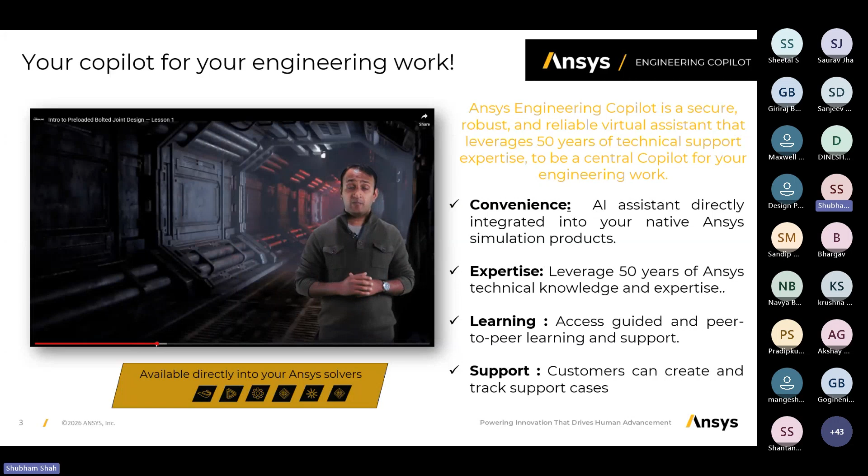Then we have the expertise, the trained models, basically based upon existing Ansys technical knowledge and expertise. So here you will not find any open source data - all the results or answers you get will be based on your Ansys database itself. You can also have the learning access.

Let's say you're very new to the simulation domain and want to learn, or you're an advanced level user wanting to expand your working knowledge on certain advanced topics - that can also be done using this Copilot. And then there is upcoming support from where you can raise support requests directly. This is an upcoming part.

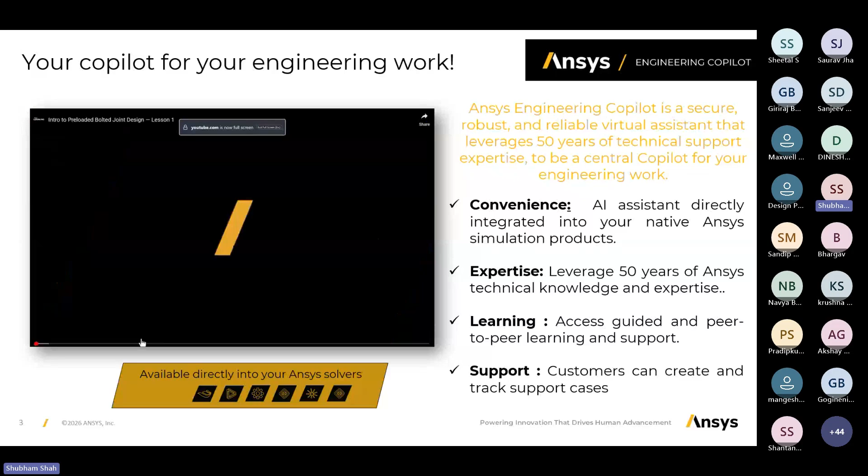So with the Copilot, you can search across the entire Ansys website. You have access to 1000 plus Ansys Innovation courses, which are majorly free. Then there are knowledge articles - a huge amount available. Then there's a global forum where you can post queries and get responses from global Ansys users. And you have 24/7 virtual assistants along with the tool.

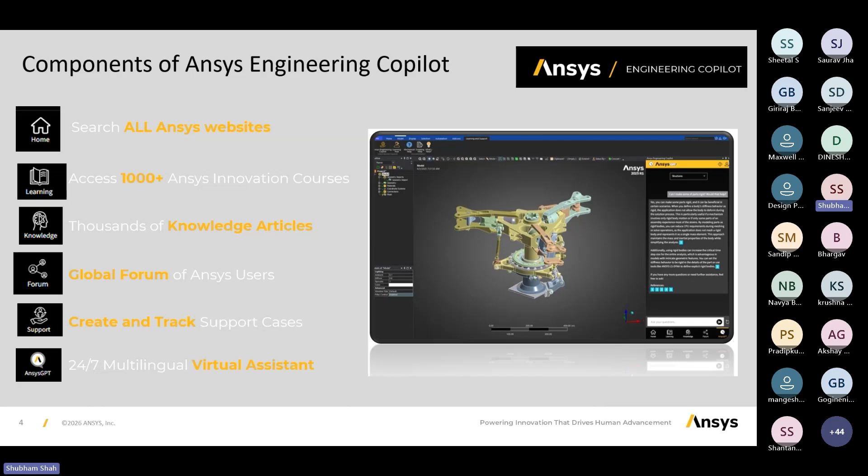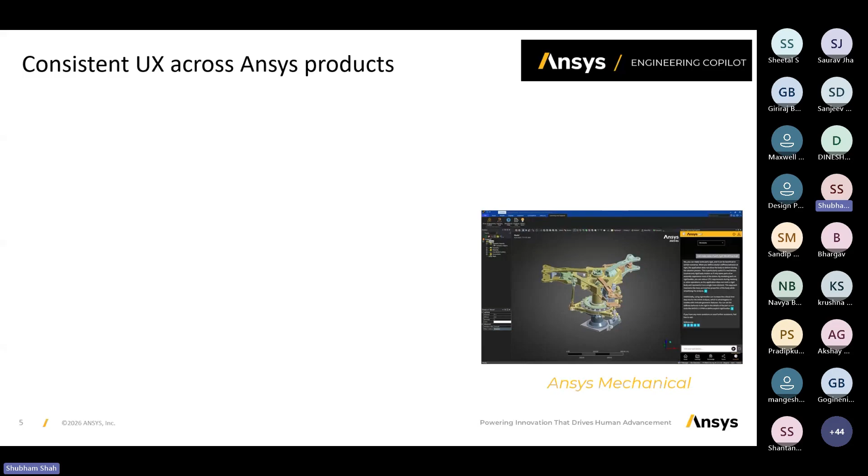So this is the consistent UX. Basically, it's not limited to any of the products with the tools, the solvers. You can use it with Ansys Mechanical, use it with Discovery, the SCADE one, the Fluent. So it is not restricted to only one or two physics. It is open for all the physics.

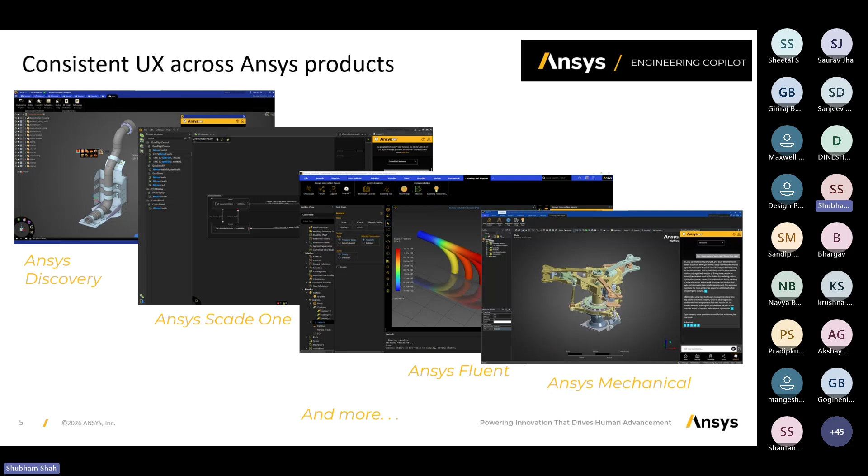So now I will take you to the tool where we can see how we can open and use it and what are the different ways to utilize this. Let me show this project which has already been opened. A simple fluid flow problem is there. So this is the Fluent UI basically, the CFD part, and on the top of the ribbon you can see there is a learning and support tab which is already there.

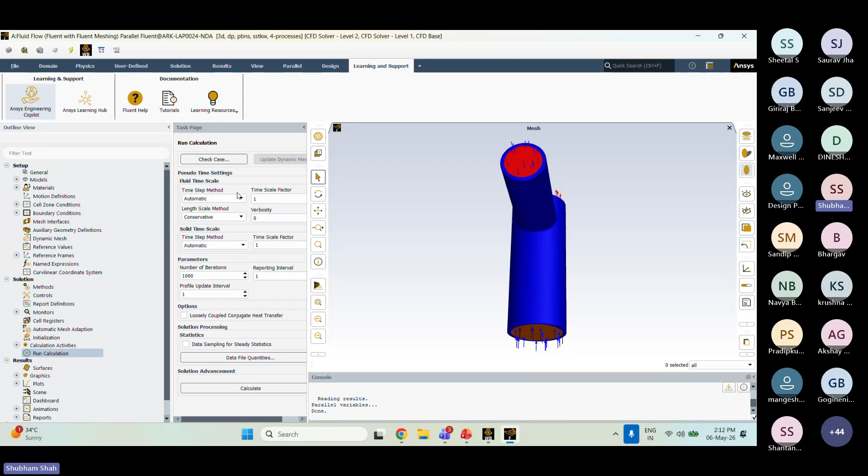So we just have to click over here, and from here you can see Ansys Engineering Copilot, Ansys Learning Hub, Fluent tutorials and learning resources are there. Once you click on this Engineering Copilot, you can see on the right hand side Engineering Copilot has been opened up. So this is all inside the tool itself.

So once you open it up, you have to log in. It will ask you for the username and password. Once you enter the username and password, you can have the access for the Copilot. And the major thing is this is not a separate license and it is free of cost.

Then you have a learning tab where you can go for the learning. You can search for your learning based upon which physics you want to learn. So this is fluid. Let's say I want to see how to perform the external aerodynamics, right? So once I click, it will pop you up to a new window.

And from here you can see this is how you can log in. So I'll just log in.

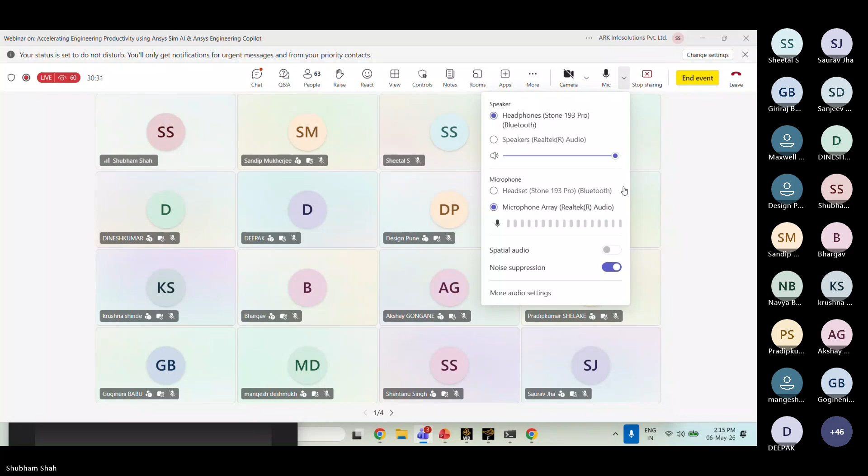Shubham, can you please check your internet connection? In between your voice disappears. Am I audible now properly? You are audible when you are speaking, sometimes your voice disappears. Okay, just a second, I will check it up with the microphone settings also. Now is it properly audible to you all, or you are facing any lag or something like that? It's perfect, it's perfect now. Okay, no problem.

So as you can see, I have just opened this, like I want to learn the performance aerodynamic analysis of a car, how can I do it. Once you search, you can see you have been enrolled into this one. You can take the different lessons, you can go on YouTube to watch the videos. These videos will be specifically from the ANSYS domain itself, no open source material. It will showcase you. Once you open it up, you will be getting Team Sonic Boom using Ansys Discovery for F1 in school car design. So this is how you can use this Ansys GPT and Engineering Copilot.

So once again coming back to the tool. So this is for the course, this is for the knowledge. There are various tabs. You can also bookmark the articles, you want to see the general fluids article, you can search in the knowledge base. Then we have Ansys GPT, the major thing which will help you out to understand the things. So let's say here we have the Ansys GPT and you are solving any of the question problems.

Of the simple problems or advanced level of problems, and you are facing any issue, how we can resolve this?

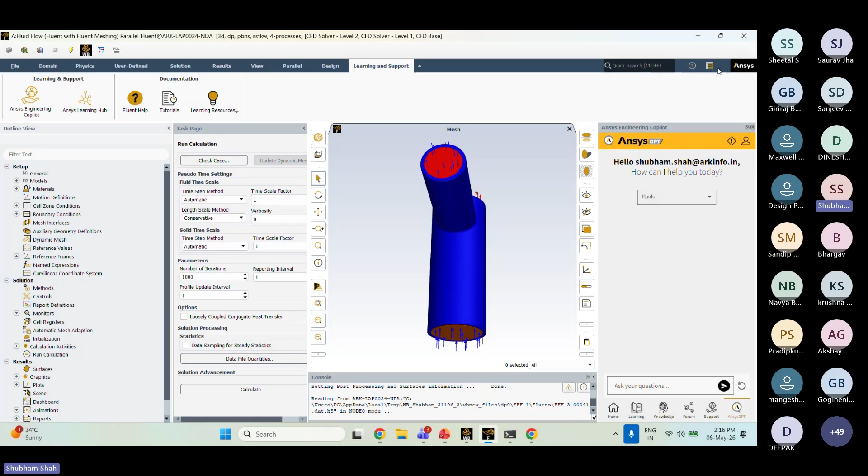For this, what I will do is take one of the problems, this simple fluid flow problem, so that we can also see the results quickly, how it is helping out. I will simply close this one, do the meshing and everything here itself. The problem is very small, so it won't take that much time to run. We will do the shared topology and some pre-processing, then move to the meshing part and see what we encounter. We'll do the setup also, and run the simulation.

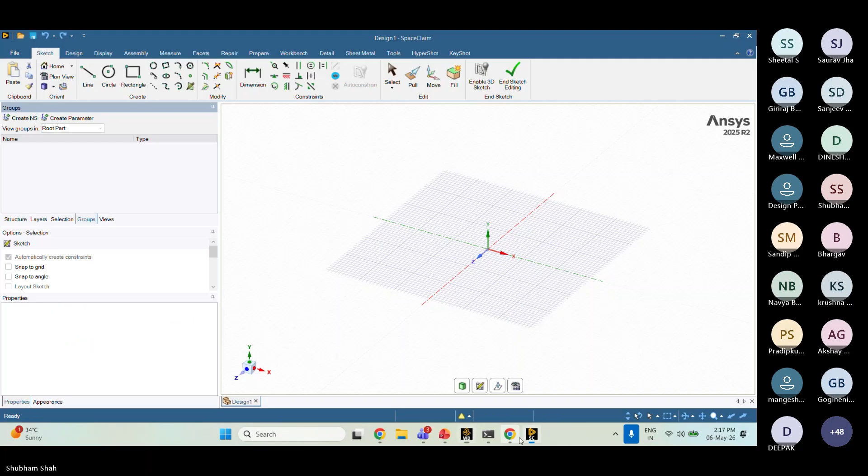So what I'm doing is, first of all, I will just unshare this one. And what I will do is I will start from scratch. I'll simply delete this one.

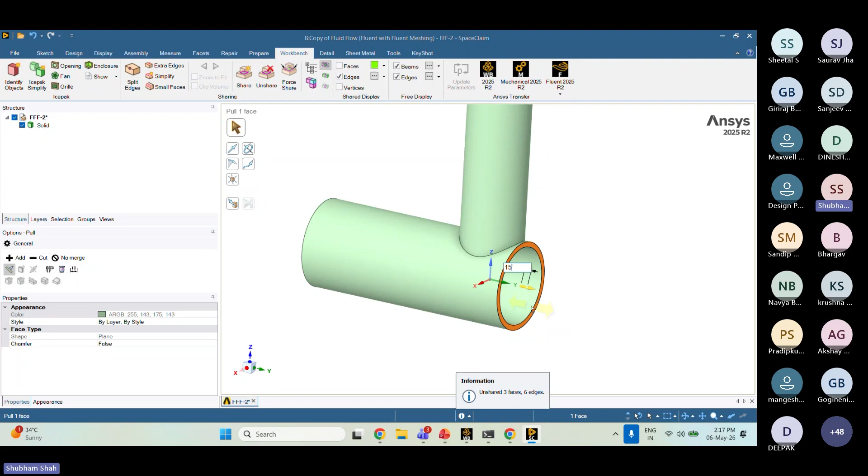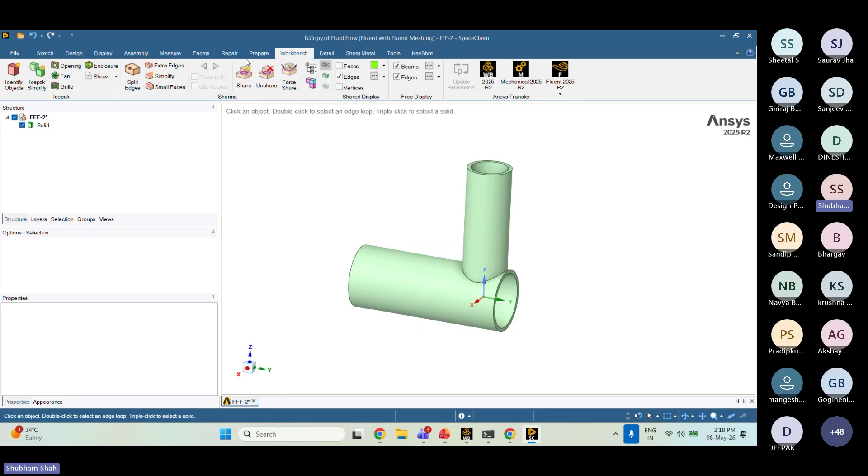Let's say our flow is going to enter from here, and it is going to leave from here. We can see here there is no such outlet domain to stabilize the flow. Now we will take suggestions from Ansys GPT also, like if this is the scenario, how we can rectify this, and based upon that we will see what different suggestions it gives us.

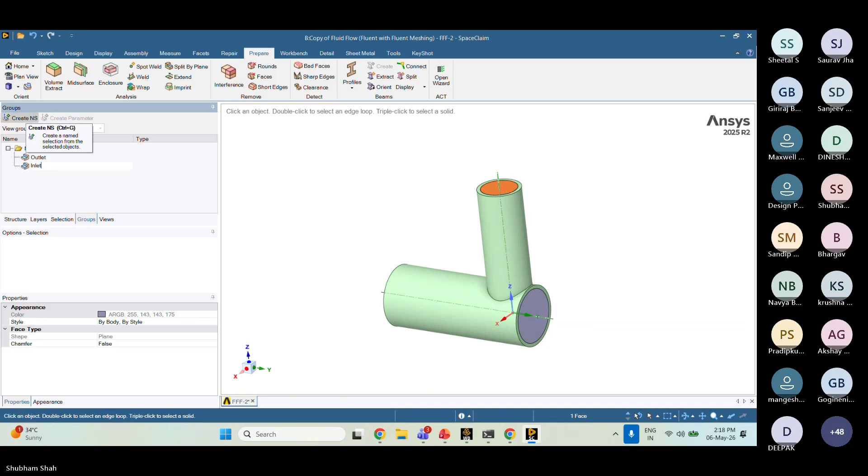First of all, we'll quickly extract the fluid volume, and I'll give the named selections. This is my outlet, I'll simply give outlet. And this is my inlet - inlet underscore small. And let's say this is my inlet large. Simply I've given the named selections. I'll share the topology.

Now I'll quickly do the meshing part. Switch it to MM. It will take around 2 to 5 minutes only for running this entire simulation, doing the meshing, and then running it for a few iterations, and then we'll see how the flow is performing, whether it is getting stabilized or not. If it is not getting stabilized, or if we encounter any reverse flow, how do we resolve that?

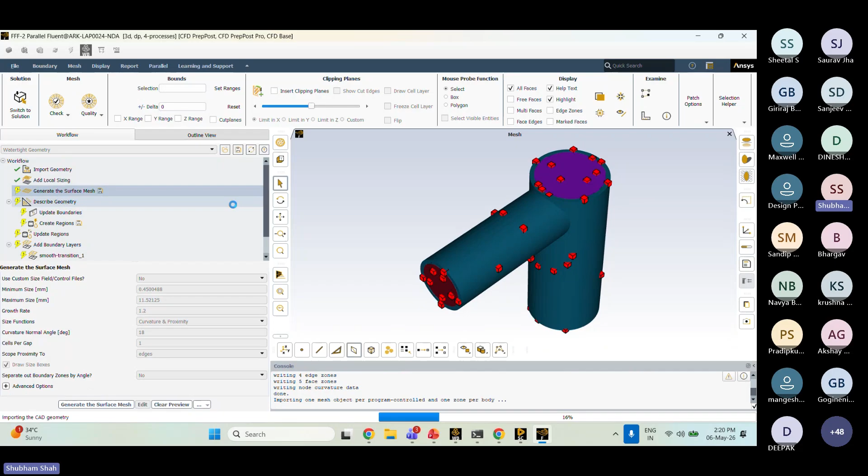So we'll simply import the geometry, and go with the default mesh generation. We will not give any kind of local sizing, since it is for a demo purpose and we don't want any sort of accuracy as of now. We are just concerned about how the flow is going to get stabilized.

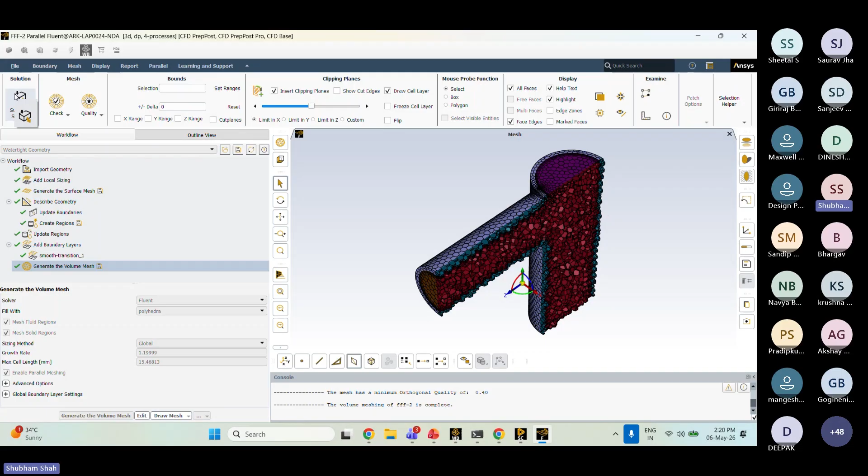The mesh quality is around minimum orthogonal quality of 0.40. We'll switch to the solution.

Once this is done, we will also take help from the GPT, that is your Ansys GPT. You can also access Ansys GPT from the direct web UI as well, from your Chrome browser or Internet Explorer. So that also I will showcase you.

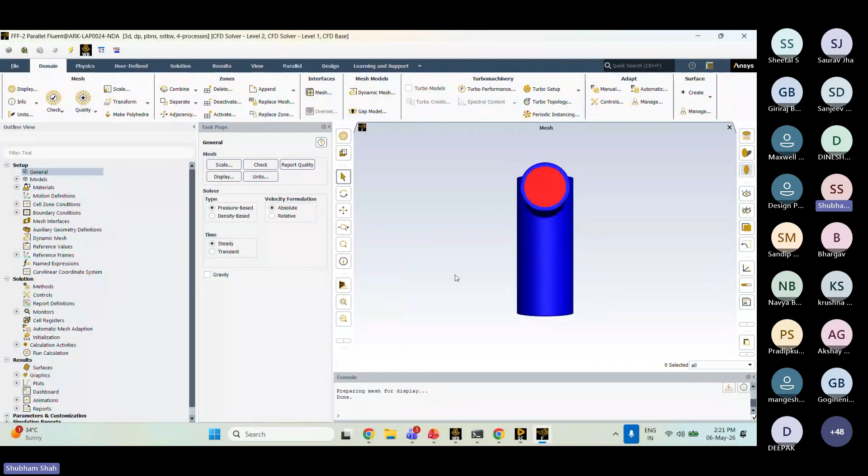So let's say this is the geometry. I want to go with the simple heat transfer, turn on the energy equation. Simply we will give the boundary conditions: inlet will be inlet, 75 degree temperature is there. Apply, close. And in the small one also, we will give, let's say, 30 meters per second and 100 degrees centigrade.

And we will simply initialize and run the simulation. This is just for the understanding point of view, so we can skip a few of the conditions as well.

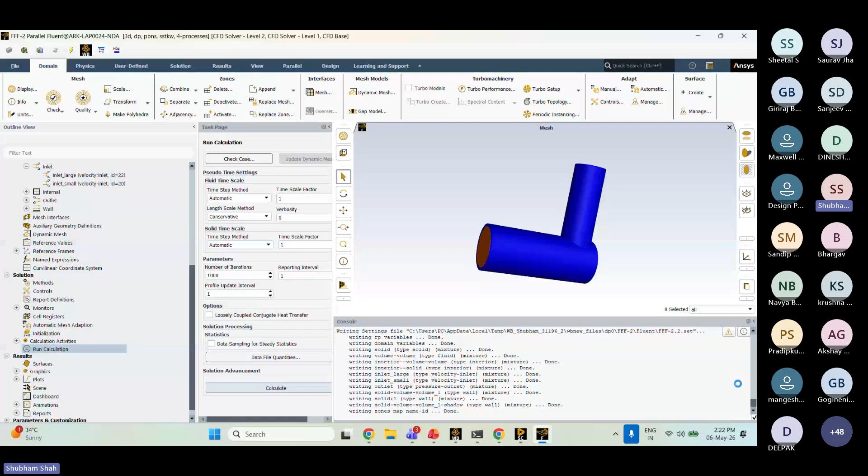So you can see I have just stopped. Reverse flow is increasing from 0.1, 0.3, 0.4, 0.7, 0.9, 1.1, 1.4. It might also increase to 50% or 70%.

Now let's say you have run this for 1,000 iterations and your reverse flow is not reducing. If it is under 10%, that is okay, it won't create that much of a problem. But when you are working on any kind of MRF simulations, blower simulations, pump kind of simulation, or turbo machinery, at that point if your outlet is too close to your recirculation zones or the blower outlet domain, the MRF region, you will see a lot of instabilities in the flow. So at that point, how do we rectify this kind of challenge?

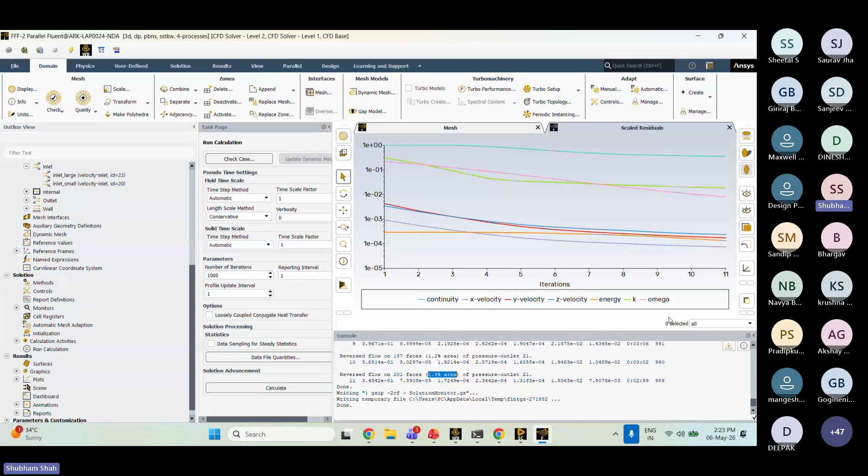So let's say right now it is 1.4%. It is under the good-to-go conditions, but we are concerned because we don't want any sort of reverse flow. So either you run it for more iterations, or let's take the suggestion from the GPT.

So here is your engineering copilot, and you can see it is getting loaded. Once it is open, we will ask the Ansys GPT, since we are facing a reverse flow issue. You can go to the GPT part, fluids domain, and ask your question here.

I am facing reversed flow in simple... I am facing reverse flow mixing... T simulation.

How to resolve the reverse flow? I'll simply press enter, and it will give the feedback based upon the questions you have asked.

Reverse flow in mixing tee typically occurs when the local pressure difference across the boundary causes the flow direction to change, and it will give the resource from where it is taking it. Similarly, it will also occur in cases where there's persistent convergence problems, especially in mixing planes. It gives you answers based upon the questions you are asking.

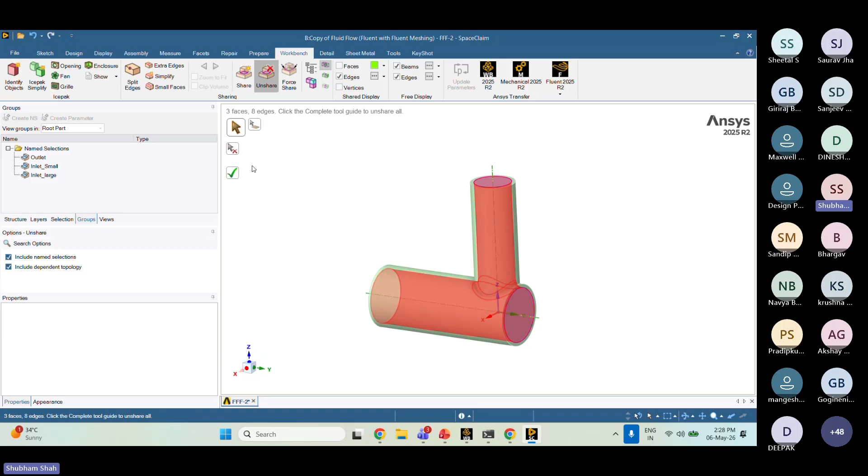We'll come back to the geometry once again. I'll simply share and pull this volume directly.

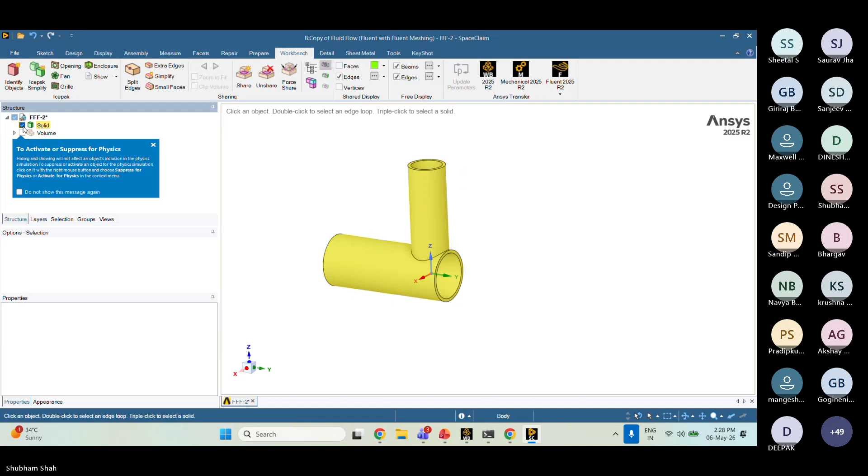It's 250 mm. Let's say 100 mm. If it seems less, we can go with 150 mm or 200 mm.

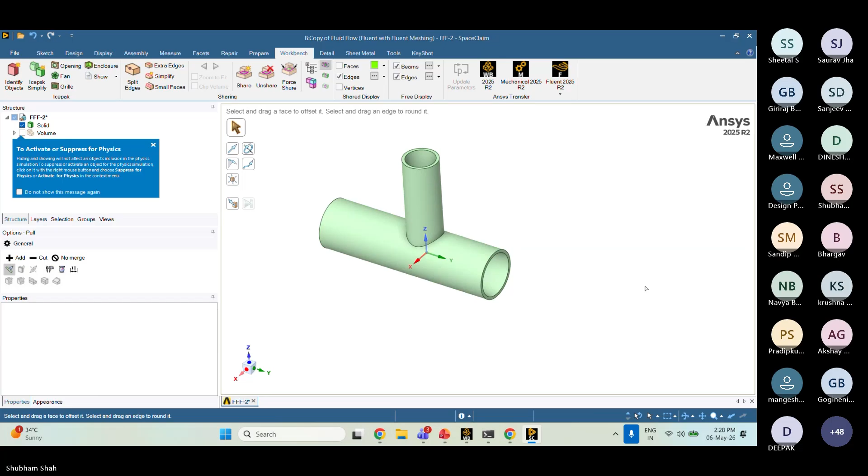Now we can extract the fluid volume, or you can directly pull this volume as well, and there is no problem in that also. I generally prefer going with volume extraction again, if there are any sort of joints available.

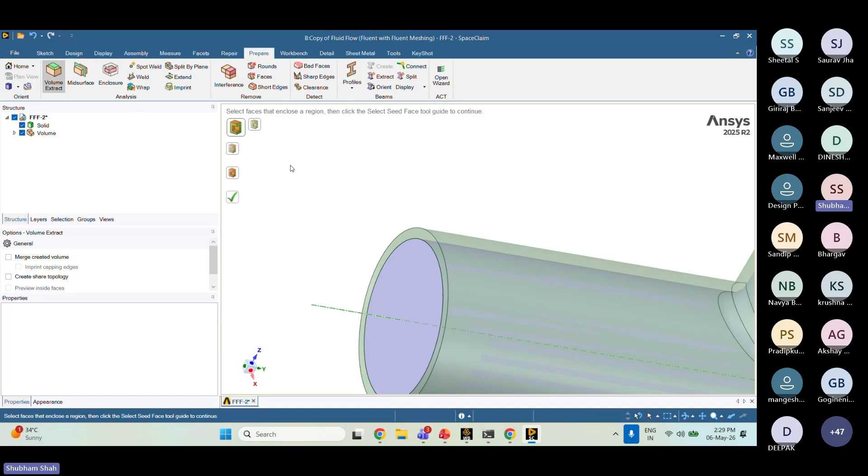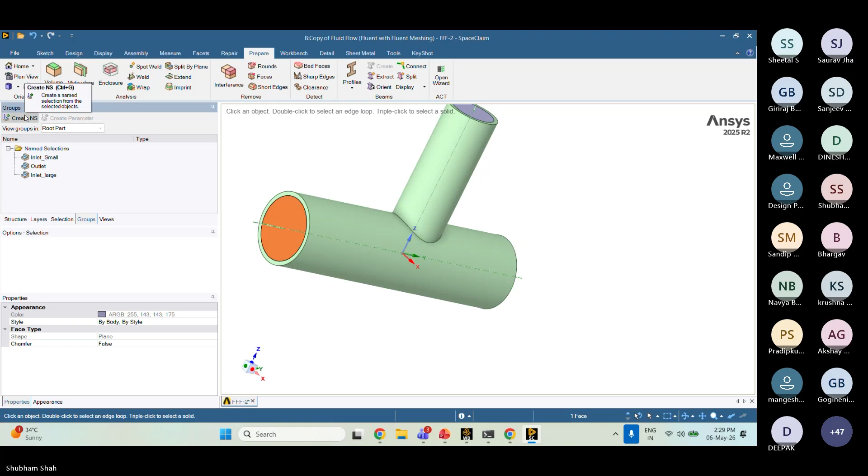Simply we will do this. We can quickly give the named selections. This is your outlet, this is your inlet. Quickly we'll do the share topology, and then we'll update the mesh directly.

So this will help you out where you are seeing significant amounts of reverse flow, or when you are dealing with any sort of turbulent turbomachinery kind of problem, especially where there are impellers or rotary equipment involved, whether it's your pump or your blower. There you generally face the issue of reverse flow.

So there you can extend the domain. How do we extend the domain? That also you can ask the GPT, like how generally we can extend it. The general criteria is we generally extend the domain based upon the diameter, so 3 to 5x of the diameter we extend the outlet domain.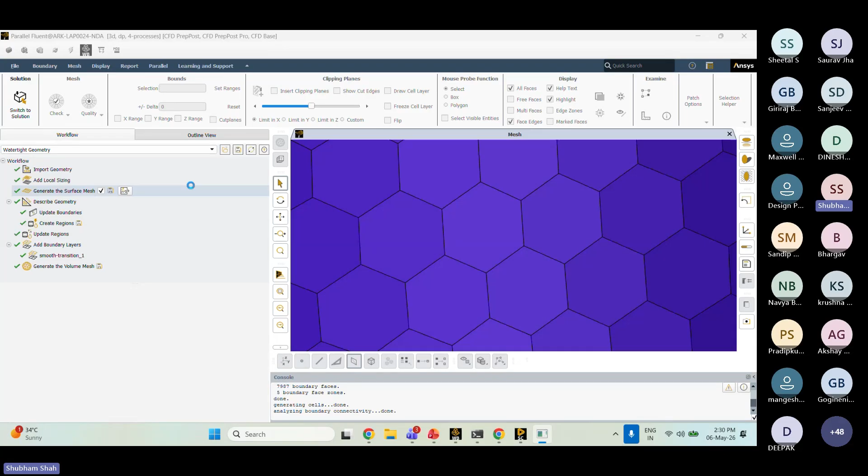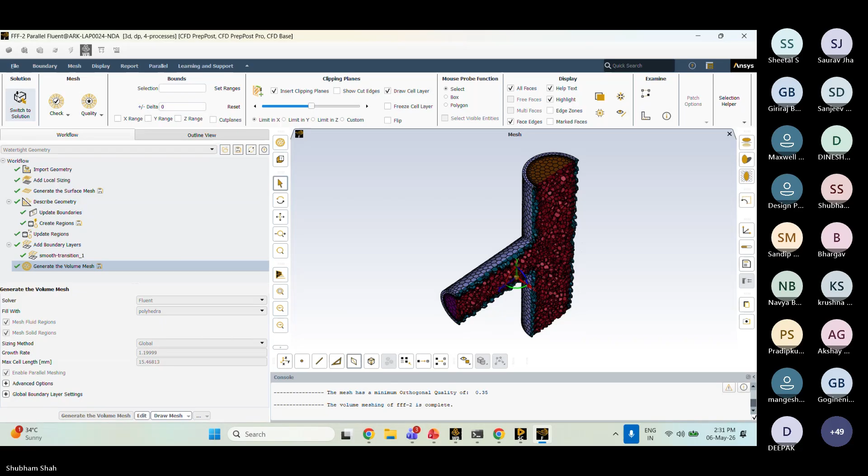So, has anyone of you used this Ansys GPT, or are you aware of how we can use this GPT in our day-to-day work, or are you getting to know it for the first time?

Shubham, there are people who have questions on the GPT. Okay, so these questions are on the chat box. Yes, they are on the chat box. Some questions are like, from what version and above is it available to use?

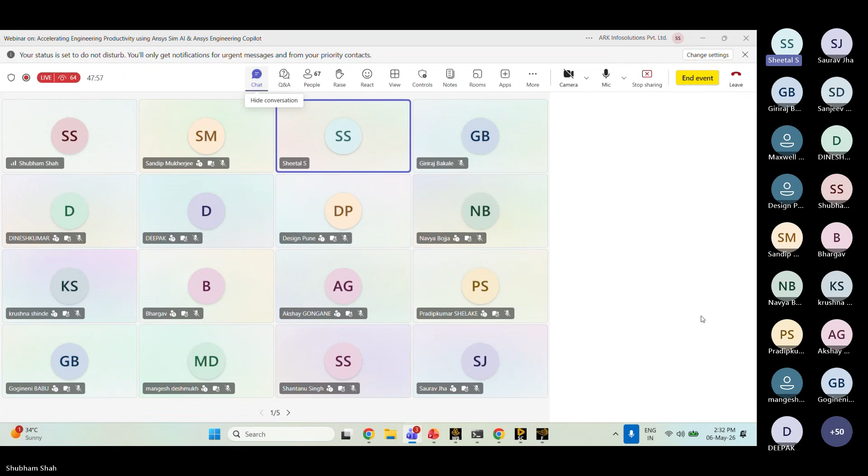Okay, there are a lot of questions I think. So, this is available from 25 R1 onwards. I think you might be using a previous version, so that might be the problem.

In Workbench Mechanical, would it also work similarly? Yes, in Mechanical also it would work the similar way to use this Ansys GPT and the Engineering Copilot. In Mechanical you can also find the learning and support tab similar to this, and from there you can use it. So there is no restriction based upon the physics.

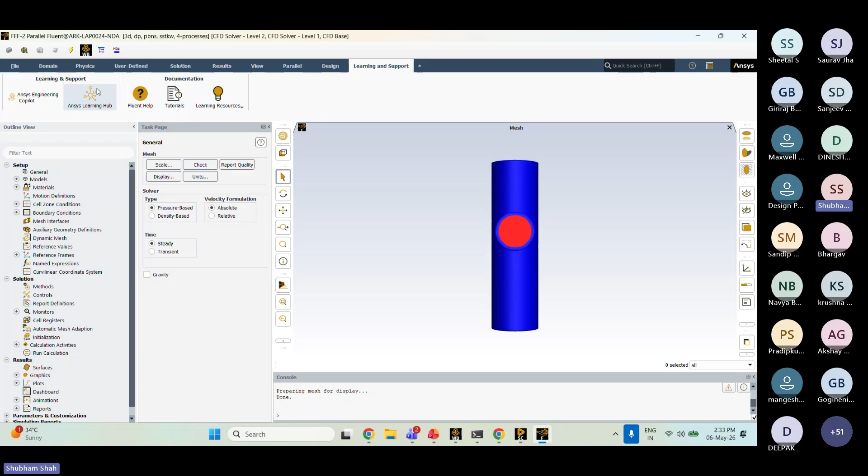Sorry to interrupt, sir. Sir, is there any limitation of license? Can we use this on the student version also?

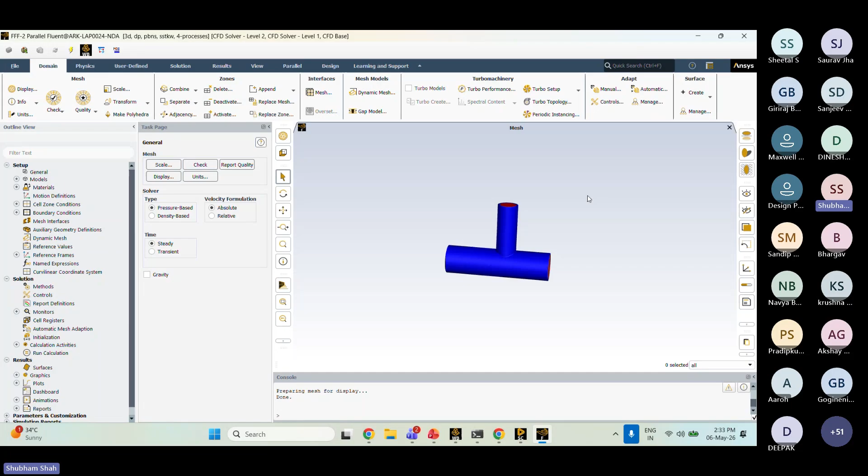Student version, yes, I think you can use it, but this is generally for commercial use. This feature is included in the commercial license at no extra cost, but it's majorly for commercial use. It will also be there in the student version, with no such restrictions to use it. But the main thing is it is only supported in 2025 R1 or above. If you are using a lower version before 25 R1, this feature will not be there.

So this has been introduced in 2025. I am using 2025 R2, and in that it is available. I hope your query is clear, right? Yeah, thank you so much, sir.

Okay, welcome. So now we'll simply take the same boundary conditions, we will not change them, and we will see if the reverse flow is resolved or not.

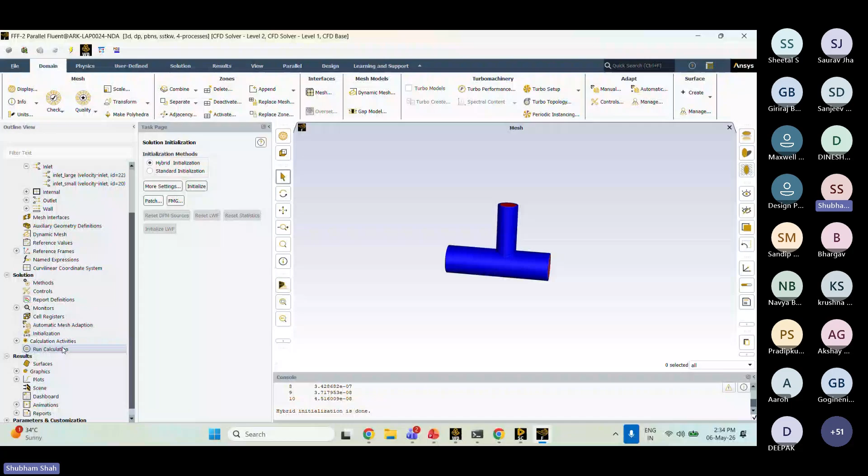So you can see the reverse flow is resolved. Additionally, in the first few iterations only, you can see there is no reverse flow at all. So this is how you can take suggestions from the Ansys GPT if you get stuck at any point of time, for smaller queries or even for training materials.

So let's say you've resolved this, or let's say you might be working on complex physics or mismatching boundary conditions. So you might sometimes get the error of floating point exceptions, right, if you are aware of it.

So if you get any sort of that error, you can simply write: I am getting a floating point exception error. So the GPT will help you rectify these errors. It will showcase a few suggestions. You can try them out, check it step by step, to find what could be the possible cause of this floating point exception.

Generally, numerical instability is there, so setup-wise that is the major thing. Apart from that, your hardware can also restrict it if the hardware is low. So you can see floating point exception common causes: poor mesh resolution, improper boundary condition placement, linear solver failure, insufficient solver memory allocation.

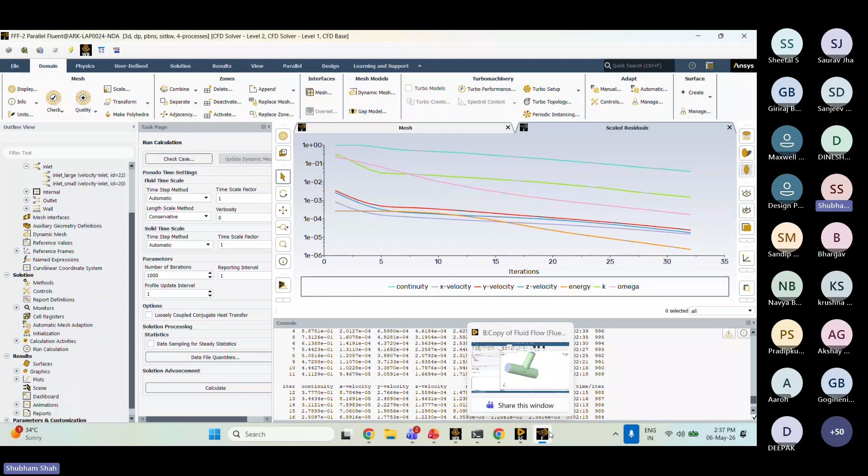ALH access is now directly linked over here, so you can directly go to ALH. Otherwise, if you're not so sure which multi-phase topic would be available where, you can write it here in the AIS, Ansys Innovation Space, or type the same in the GPT. So let's say I want to search the AIS, go into the learning phase, or select fluids, or let's say external aerodynamics.

So whatever is relevant and available to the term external aerodynamics will come over here. So external aerodynamics of a supersonic rocket, aerodynamics of a solar car, getting started with Ansys Fluent multi-GPU solver, external aerodynamics, introduction to aerodynamics 10, aerodynamics of a race car.

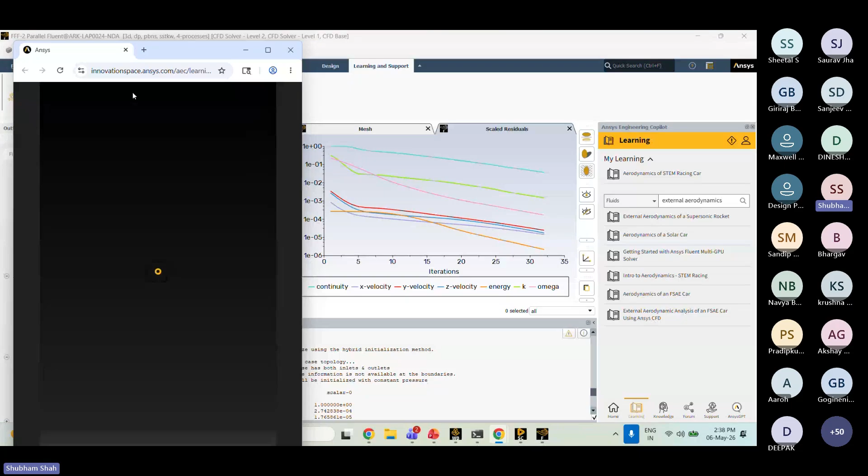So this is how you can use it. Let's say I want to go with the supersonic rocket. I can simply click it over here and it will open the Ansys Innovation Space in a new tab. From here you can take the lessons, you can enroll, you can take the entire lessons from here, and you can also get the simulation files and download them to follow the steps.

You can follow the material lessons, refer to the YouTube videos, and then go on to the next lesson: how to prepare the geometry, how to do the meshing interface, the meshing simulation setup, post processing, and then the parametric study. How do we do the parametric study for the external aerodynamics? And if you want to take the quiz, you can also take the practice quiz. This is how you can perform any kind of learning courses through this.

You can also get this from Ansys GPT as well. So from GPT also you can take this. Let's say you are in GPT and you want some tutorial.

Let's say you are working on some radiation model or something like that, and you want some tutorials on that. Or let's take an example of mixing tank only. So: mixing tank CFD simulation tutorials. All the mixing tank related simulation tutorials, it will share the link over here.

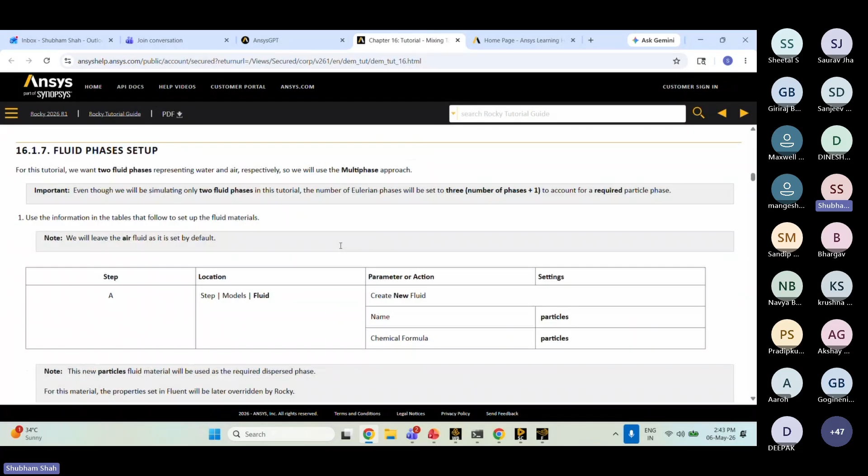So you can see this is a tutorial for the mixing tank, and it is also based on Fluent-Rocky coupling. You can see the entire tutorial with everything, step-by-step process has been given over here, so we can refer to this and do our simulation. This applies to whichever domain or physics you are working in.

If you face some sort of queries or errors during your simulation, this is a very handy tool placed inside your tool itself, and it's very easy to use. You can quickly ask questions and get tutorials if available, which you can use for reference cases.

You can also post any questions in the forum. Add a new post from here, create the category, and enter it—let's say it is for Ansys 3D design, which is basically your Discovery modeling or SpaceClaim.

Enter the title of the discussion and the details. If you have any screenshots, working files, or any URL you want to enter, you can add them and post it. It will get posted in the Ansys forum, so Ansys users who go through it will suggest answers, or you can have an open discussion—it's basically an open discussion platform.

So this access is also there. And then again, this GPT is already there for your 24/7 virtual assistant. So this is how you can use the Engineering Copilot and Ansys GPTs.

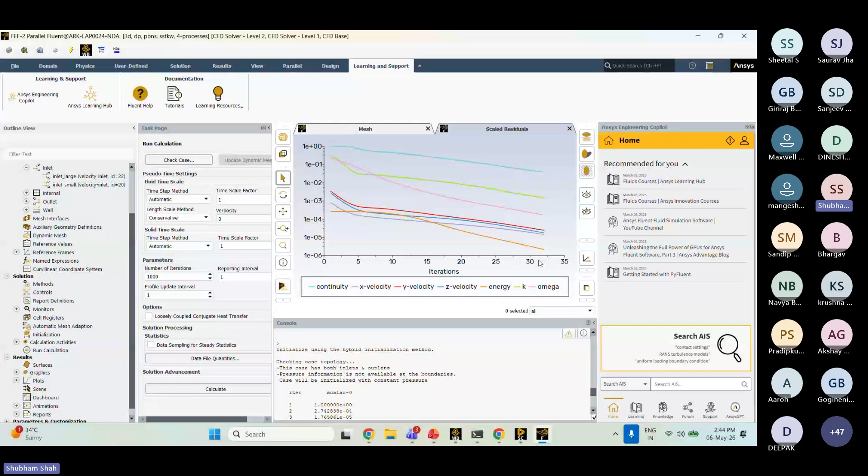So any questions up till now? I think there are two questions in the chat box, please.

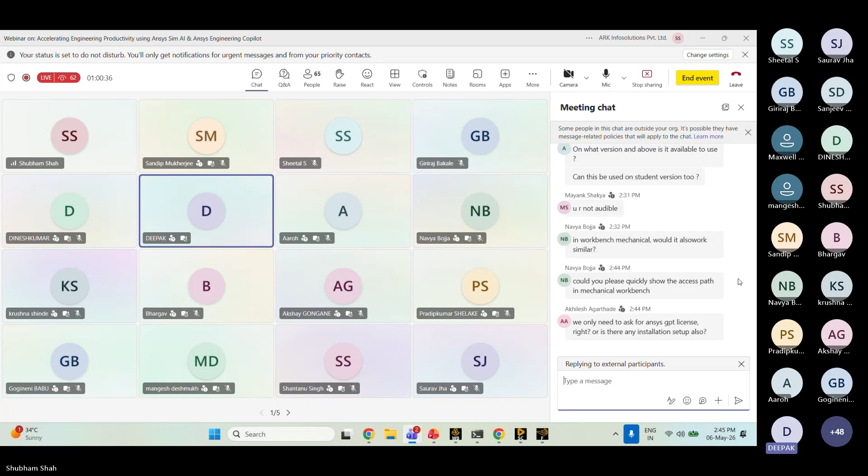Earlier the Ansys GPT was outside of the workbench, right? So we would have to access it separately. Now it is inside the workbench—for any of the applications, we can just pick it up and use it. Since this Fluent, I have launched it inside the workbench only, so this will be inside your Fluent.

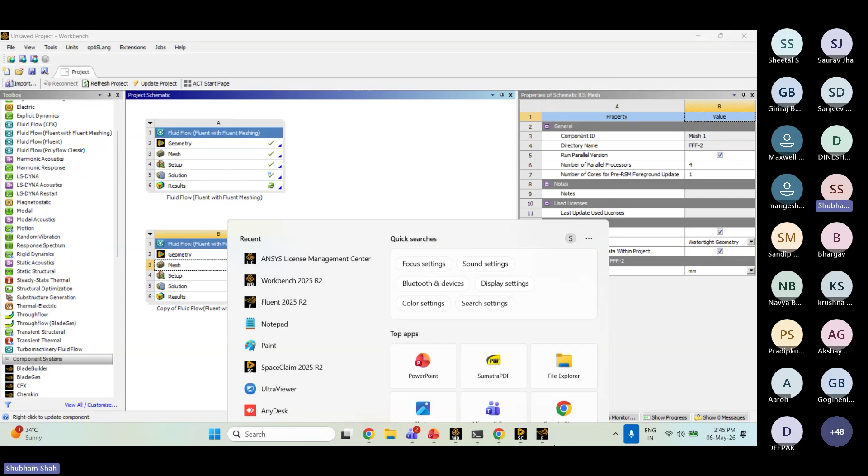In a similar way, let's say if you want it for Discovery modeling, so in Discovery also it is there—Discovery modeling, simulation. So it is available both in standalone as well as for your workbench also. Earlier it was outside, but now it has been integrated inside this only.

In 2025 R2, you will find a section called Learning and Support. From there only, you can use this Ansys Engineering Copilot inside the tool. And also, if you want to go outside the tool in the open browser, that option is also available, in the browser menu. So both options are available.

You just have to register it, and also if you are having this ALH license at your end, that would be more helpful for you. So you can also go through the content on ALH, which is available. Otherwise, even without ALH, you will get the open source—open sources in YouTube links and the tutorials in the manuals and all that you can access.

Can it be used, for instance, in harmonic modal analysis? Yes, you can use it in any of the analysis. That is not a restriction.

So let's say you are doing a modal analysis or harmonic analysis and you are facing some sort of error, or there is some challenge, or you are getting some sort of errors while performing the simulation. That error also you can mention in the Ansys GPT, and that will help you understand why this error is happening.

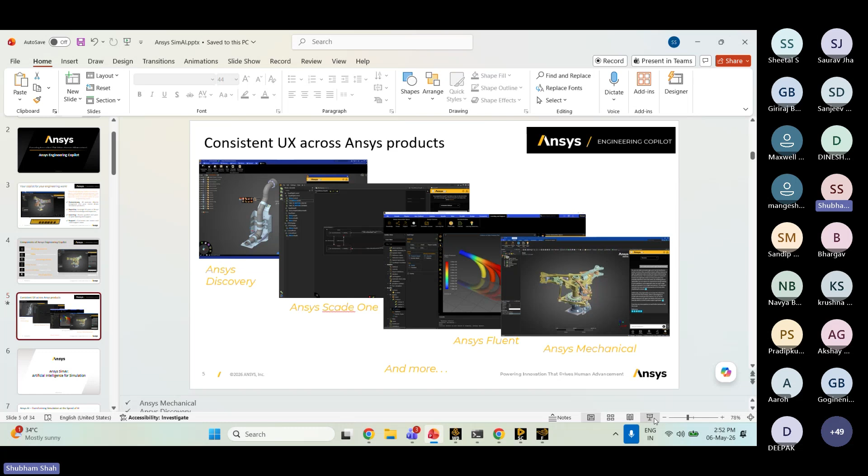SimAI is basically your artificial intelligence for the simulation world. Ansys AI consists of three parts: Ansys AI Plus, our upcoming part which will be there as an add-on; Ansys SimAI, which we will talk about and I will give an overview of now; and Ansys GPT and Copilot, which we have already discussed, where I showcased a simple demo of how we can take suggestions from the GPT and perform our simulation with the result solutions.

When it comes to SimAI, that is basically speeding up the simulation with the help of AI. Three steps are involved: first, upload your past simulation data; then train the AI model as per your requirement; and then we predict the results in seconds or minutes basically. So this involves a three-step process: upload, train, and predict.

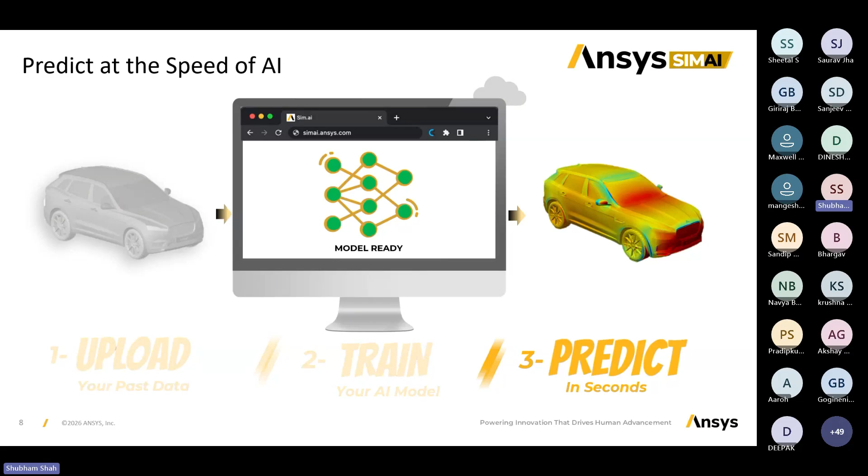I will also show you the brief workflow and a demo of SimAI. I have got a few videos which will help you understand the entire working demo of SimAI. Basically, SimAI is a new cloud-based AI platform for simulations, which will help you speed up the simulation. But it doesn't matter which physics, it is physics neutral.

You can perform any kind of physics simulations, whether it's structure, fluids, optics, or electromagnetics. It can work across all industry segments, whether you are in semiconductor, electrical, motor manufacturing, automotive, EV industries, or aerospace. This will help you out.

Any sort of 3D simulation data, it will help. So let's say you are training your AI model for simulation, but your previous runs were done from some other tool, not from Ansys. That can also help get your model trained.

So it is not only restricted to Ansys itself. Once you give this previous data and train your AI model in such a way, you get the expected results in minutes and seconds.

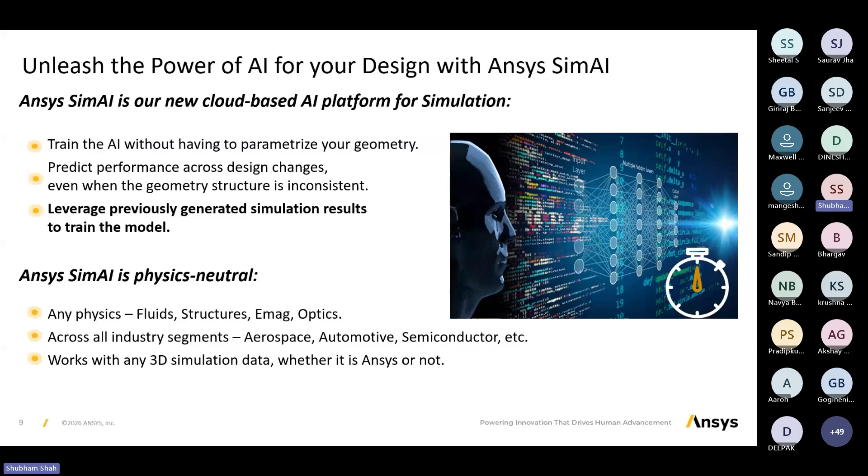With SimAI, you have to upload your data. When it comes to uploading data, we all know simulation data is huge in size, somewhere from 1 GB to 20, 25, 30 GBs. So uploading speed is 1 minute per GB, so it will not take that much time.

For training your AI models, it will take somewhere around 2 days, around 48 hours, to train your particular AI model. Then prediction of the results for the new design will take somewhere around a few seconds to a few minutes.

When it comes to training your AI model, if you want to perform aerodynamic simulation, we train our AI model for external aerodynamic simulation. If you have to do battery simulation, we train our AI model with battery simulation data from previous simulations already done in Ansys or another tool.

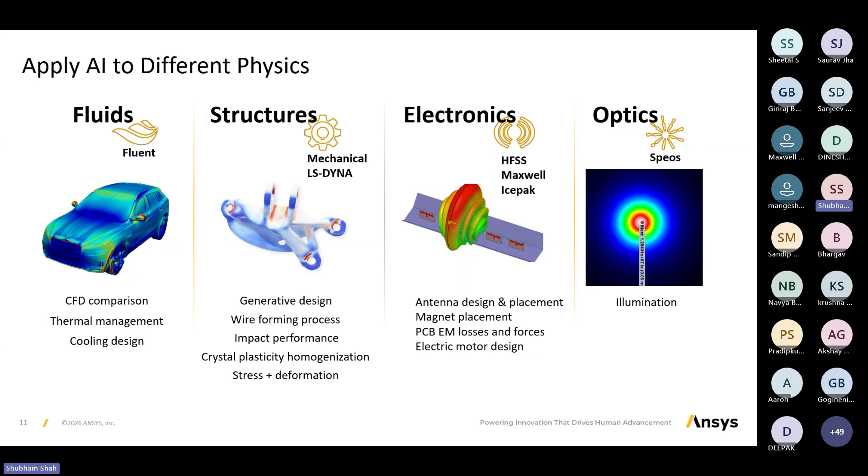So it is not restricted to any sort of physics, it is physics neutral. You can use it for fluids, that is your CFD part, you can use it for structures, mechanical LS-DYNA, electronics, or optics. All these options are available for the same AI.

Now coming towards the workflow, we'll see how the workflow helps us with the SimAI part. Basically, first we have to prepare, then explore, then validate.

What comes in prepare is data, your existing simulation data. Let's say you have been working on aerodynamic analysis for the past 1 year, or you have 20 or 30 different aerodynamic analysis datasets that you can upload.

Then you can train your SimAI model, and based on the trained model, you can explore various design parameters and simulations, and then validate the one which is more compatible or relevant to your simulation, validating that with full fidelity simulation.

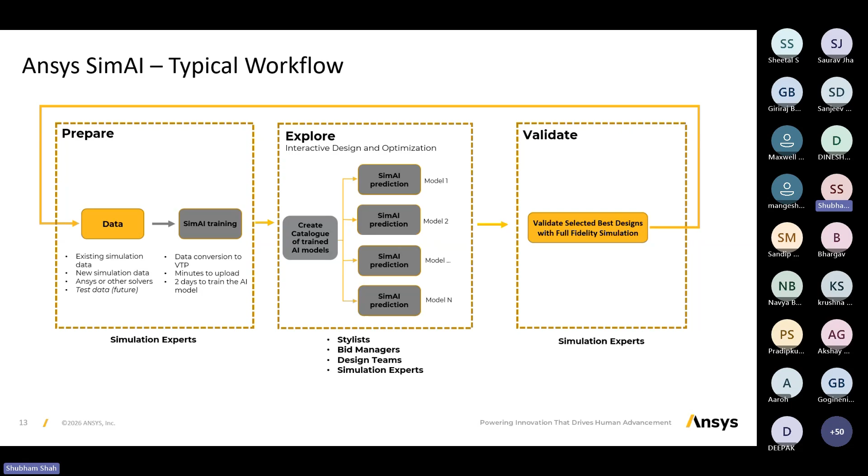So this is one of the examples of the workflow for SimAI basically: upload, train, and predict. These are the three steps for SimAI.

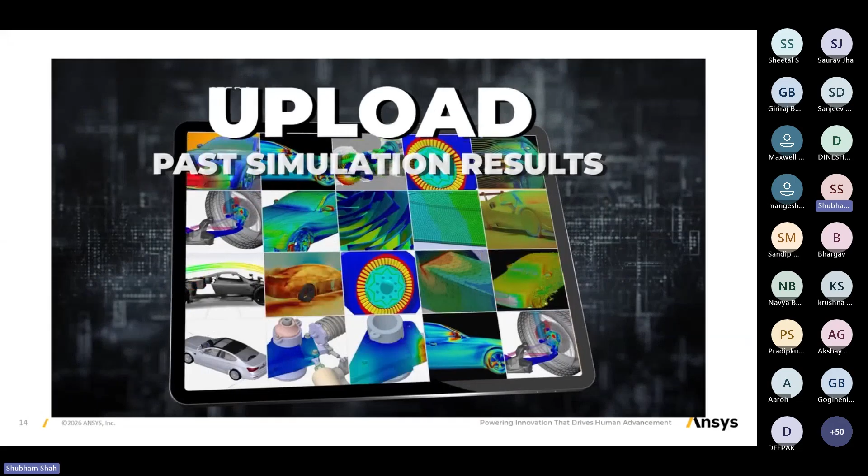We will upload the past simulation results, train your AI model, whether it's for external aerodynamics or whichever physics you want to go with the simulation. Then you can see 20 hours of simulation time only taking 2 minutes to predict the same behavior, for an external aerodynamics kind of problem.

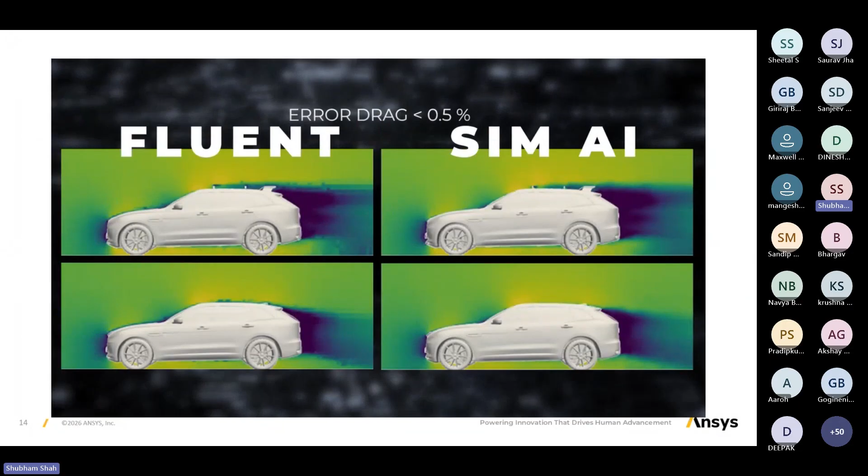Same thing, you can go with crash analysis or bumper analysis. Then there's cooling analysis, 1 hour on 64 cores, taking only a few minutes when we go with SimAI. The only thing is we have to train our model, which will require somewhere around 2 to 3 days of time.

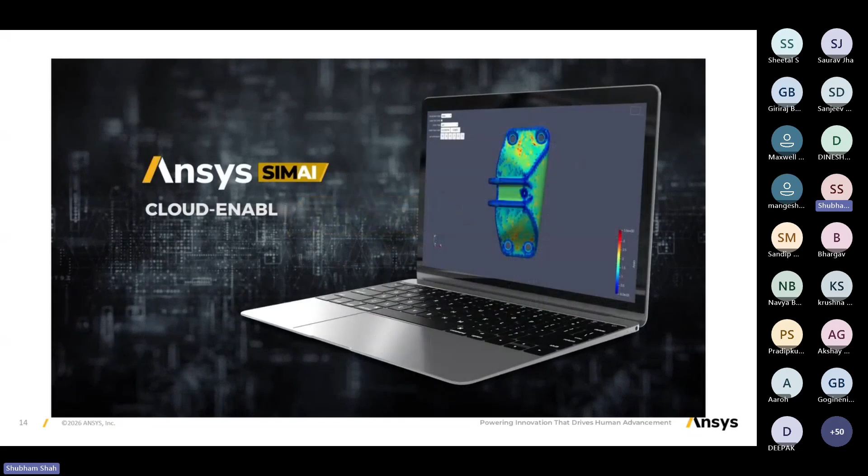Once the model has been trained, you will not take that amount of time to further predict the results.

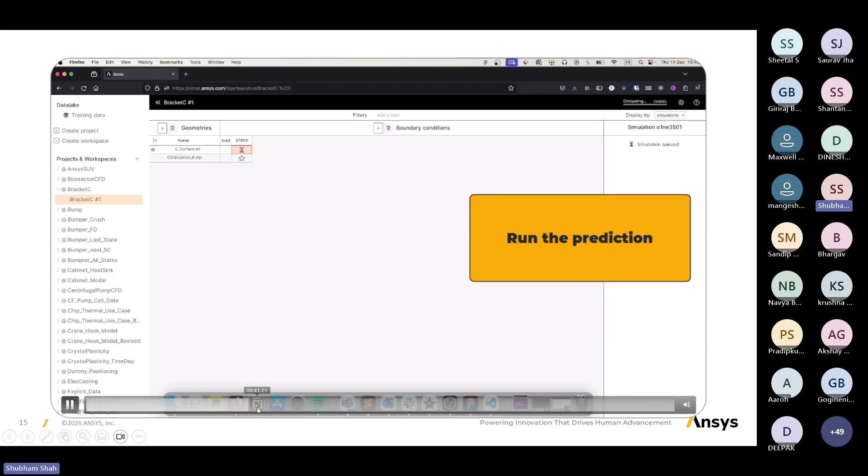Then we will be running the prediction. Similarly, if you want to upload the train data, that option is also there. On the right hand side, you can see we are generating the surface for the same.

Once we move forward, this is the run, because this model was already trained, and a trained AI version has been created. But if you want to build the model, this is the step to do it.

In this step, we will create a new project, give the project name, and train the model accordingly. We will add the existing data or add new data. We can simply drag and drop all the past simulations we've done, and it will get uploaded very fast. The speed is 1 minute per GB.

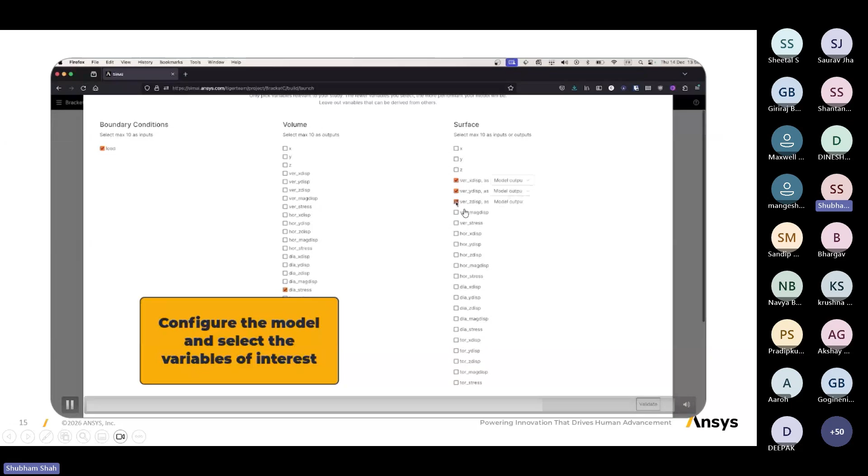Then we have to configure the model to analyze, giving the boundary conditions like what we are expecting. In this case, you can see we have selected the required parameters. This is how we configure the model and select the variable of our interest, and then we train this model accordingly. Once you do this, you have to define the volume, which you can do from here.

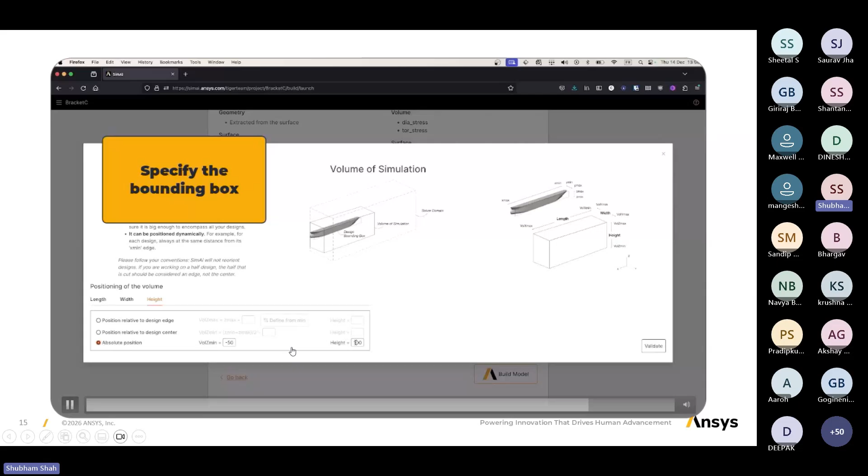This is for ship hull design. Based upon this, we build the model, and then we run for the prediction.

So these are just a few of the quantified case studies already developed. This is your bumper impact test and crane hook test for mechanical engineering. Now let me take you to the fluids case studies.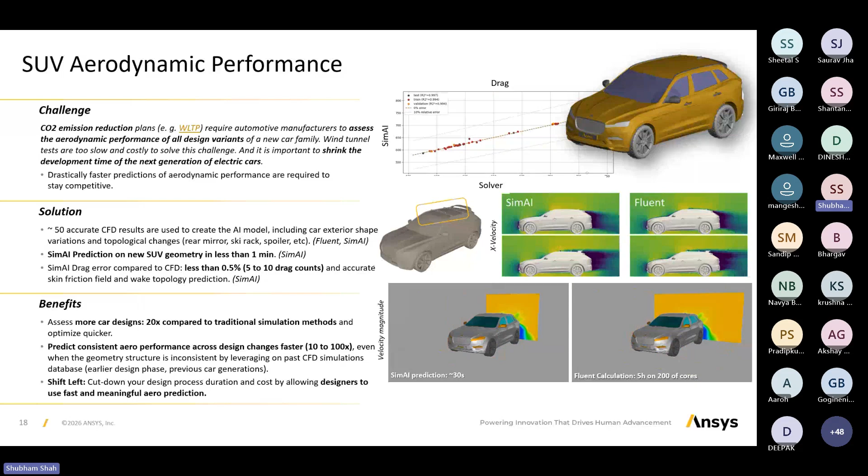These are a few various studies which we also saw. The fluid case was earlier done in Fluent, and for the Fluent calculation it took around 5 hours on 200 cores, but SimAI predicted it in approximately 30 seconds. This is how you can accelerate your simulation time and reduce the time needed to perform the entire simulations from scratch, helping you accelerate ongoing simulations using various AI tools.

This is for power inverter cooling. You can see on the bottom right hand side, Fluent took around 1 hour on 64 cores, but SimAI is nearly taking about 30 seconds. This is how you can reduce development and simulation time using SimAI.

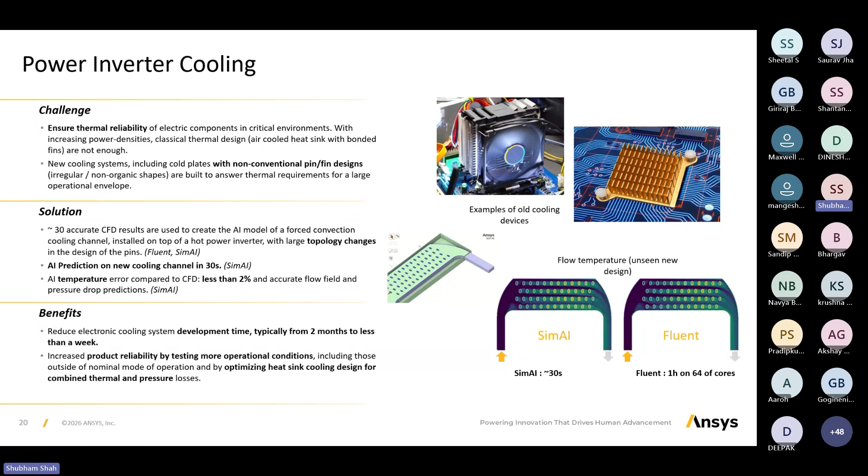You can also use this for centrifugal pump designs, or any kind of pump designs or turbo machinery parts. You can also use this for heat exchangers.

When you see the simulation with Fluent or CHT simulation Discovery, it's taking somewhere around 2 hours. But when it comes to SimAI, it's only taking 20 seconds. The outlet temperature with the detailed CHT study is around 57.3 degrees, but what SimAI is producing is 57.4 - very close to the existing results.

If you see the simulation time, it only took 20 seconds to predict. But with Fluent or any other solver, it takes more time to plot this kind of filling criteria or animation.

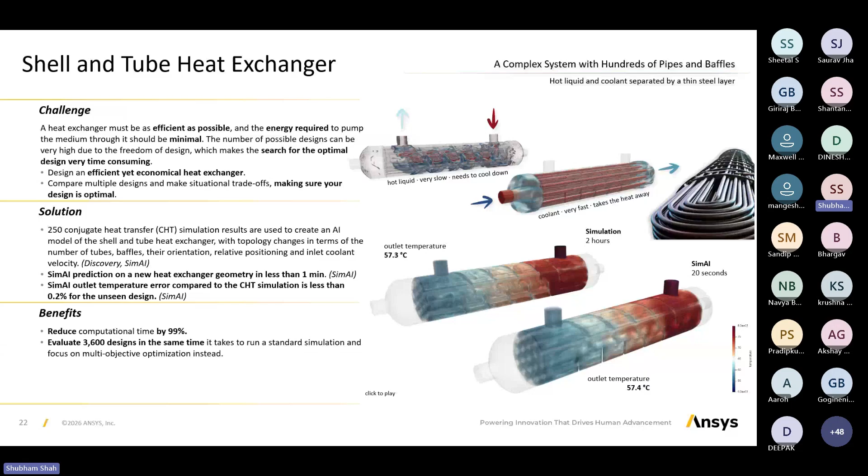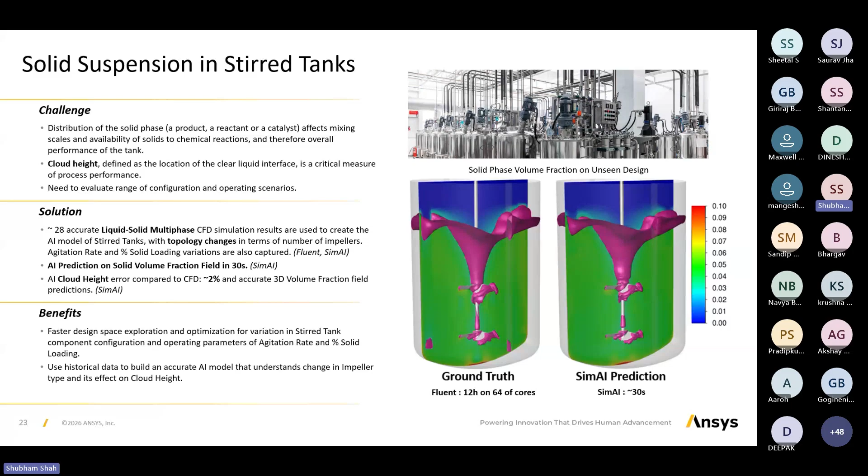Same goes with solid suspension in stirred tanks and mixing tanks. When it comes to mixing tank simulation or stirred tank simulation, Fluent takes a good amount of time to run along with the multi-phase and everything - around 12 hours on 64 cores. The same prediction with SimAI takes around 30 seconds, whether it's sparging gas in bioreactors.

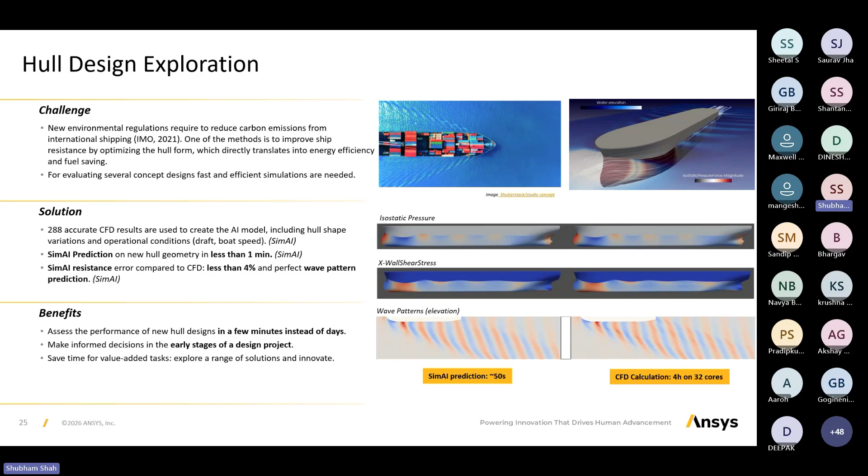This can also be done for hull design, helping you predict the simulations. The CFD calculation took 4 hours on 32 cores, but it took around a minute to do the same prediction in SimAI.

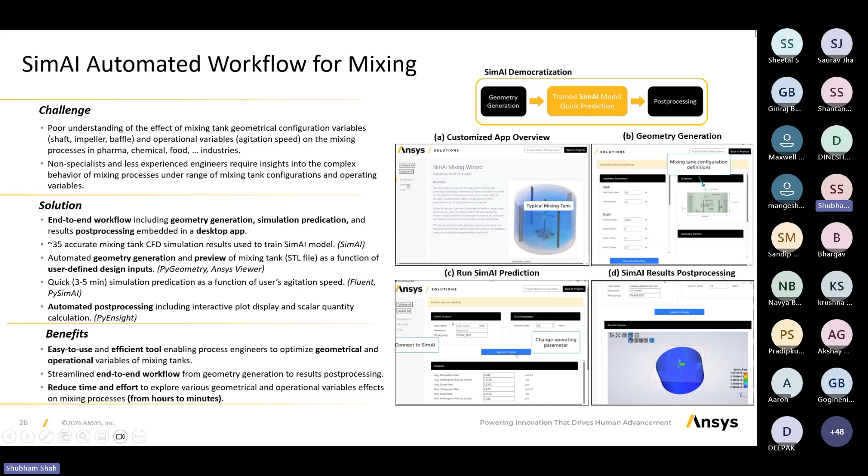This is the automatic workflow for mixing. This is how we defined or trained the model, and this is how the model will generate the prediction. That is basically your post processing for the simulation.

Same way for FSI, this is for the reed valve. The intention of showcasing all these case studies is to show the various areas where SimAI has already been used and validated.

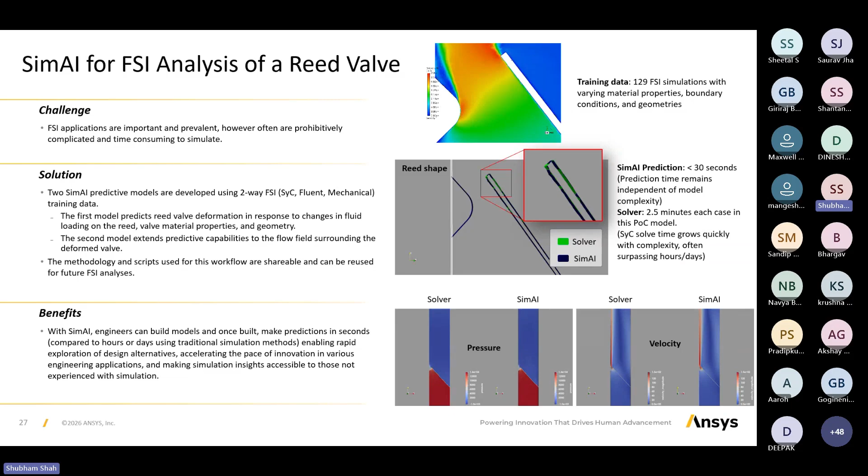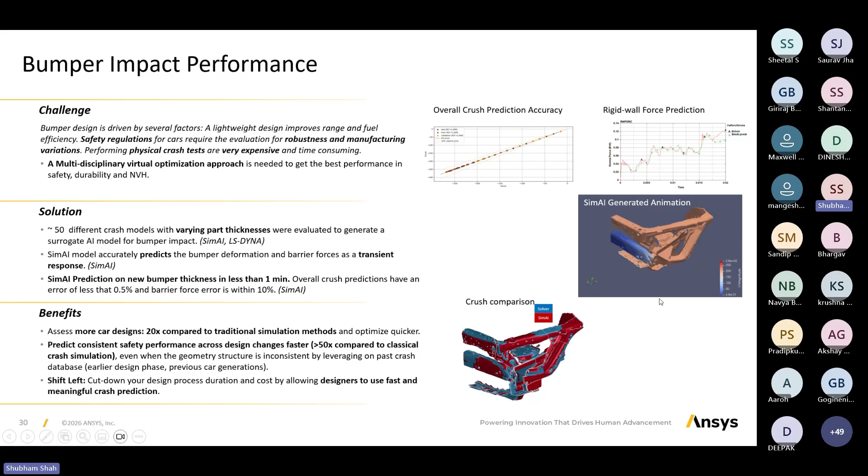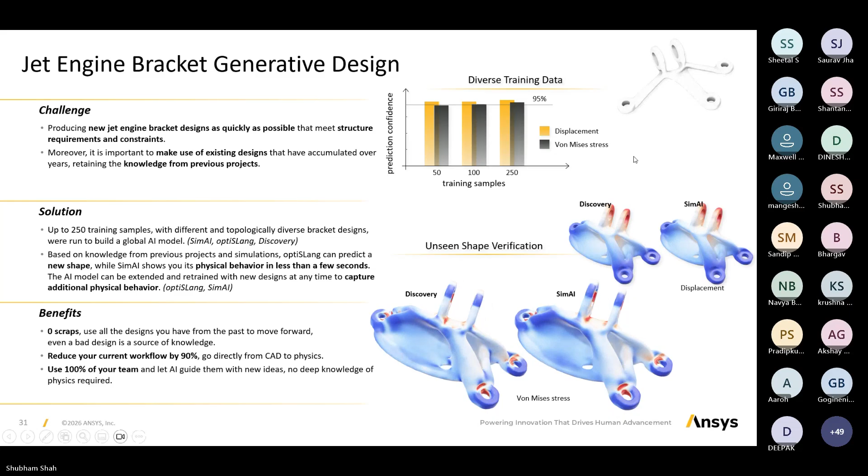You can see the displacement over here. This is for the von Mises stress, and for the first one you can see the displacement, comparatively, for the displacement versus the von Mises stress. So this is how the SimAI will help you in your day-to-day work or to accelerate the existing simulation.

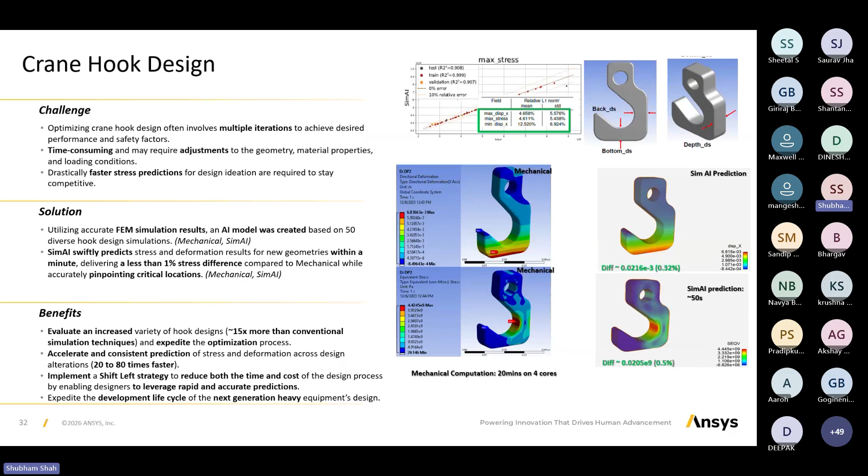So this is also very close to the accuracy. It's not like it is performing the simulation in that way — the prediction is way too fast, so it would not be that much accurate. But when we compare it to the Mechanical or CFD simulation, the difference between prediction and the Mechanical simulation is almost the same, maybe around 1% deviation might be there.

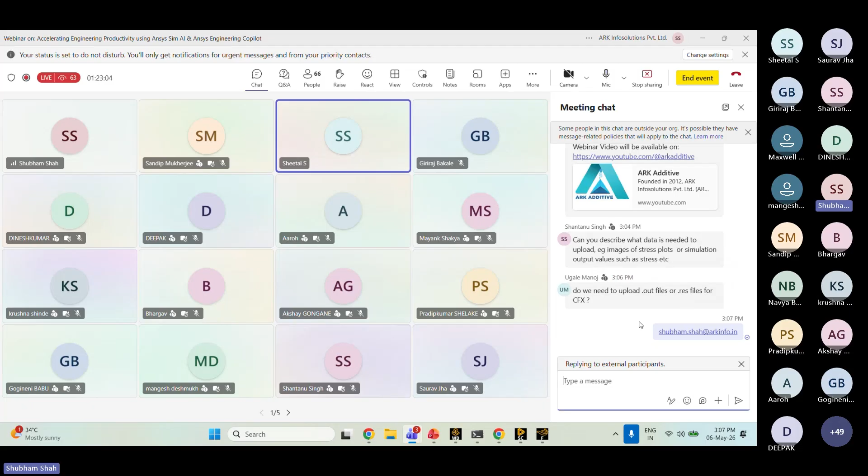So if you want to go in depth and see what are the different ways, or what are the other capabilities which we can do, for that we can have a separate session purely based upon your requirement, in which we can understand your requirement and showcase it to you.

Additional license is needed. Yeah, for SimAI, there is an additional license which is required.

So we need to upload .out files or result files, for CFX as well, generally we have to upload the result files. But still I can check it up for the CFX part, and we can get connected, and I can let you know in depth what exactly are the files for CFX which are required.

Transient analysis in Mechanical generally has 300 GB of file — is it possible? What type of file do we need to upload, if you have mentioned? We need to upload the result files basically to train the model.

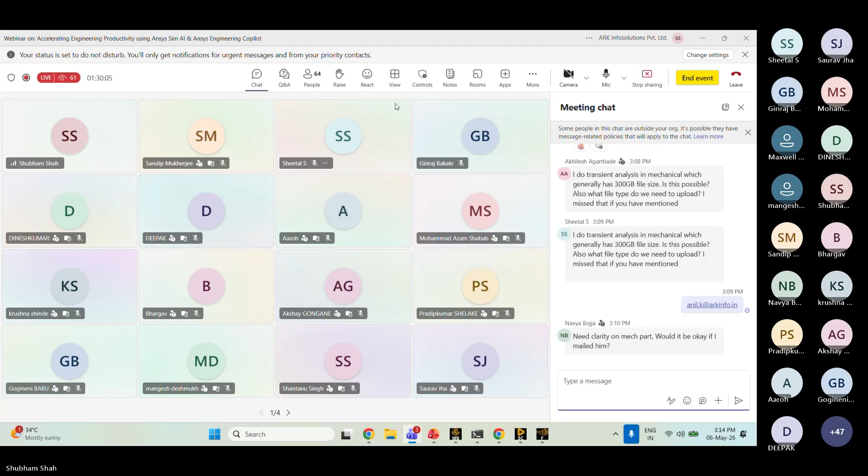Okay, fine. Hello, hello. Yeah, am I audible? Yes. You just said that the result file, the inputs we're giving, would be stored on the cloud.

Okay, but many companies have non-disclosure agreements. How do you handle that non-disclosure agreement thing? Confidentiality is obviously there for each company. This will be specific to your access only.

And also in the near future, Ansys is launching desktop versions also. Like we have fluent and mechanical that will be installed on your system itself, that version is also there. The initial version has already come, that is the SimAI Pro, which is the desktop-based version, and further enhancement with full capability is going to be there in the near future itself.

How much time can we expect for this version? I think maybe the 2026 R2 version, but we also have to check with the developers team from Ansys. Okay, thank you. Yeah, welcome.

So I hope everyone's questions have been cleared, or do you still have any questions? Even if you face anything, or want to get in touch after this webinar, if you want to know further about SimAI, I have dropped two mail IDs. You can ping on any one of them, and we will be happy to assist you further.